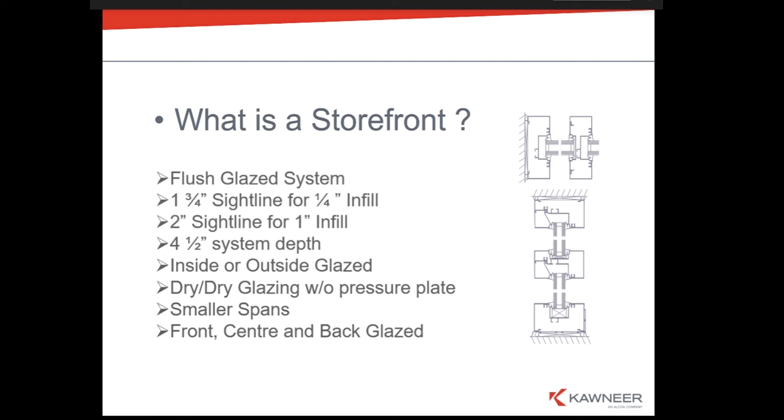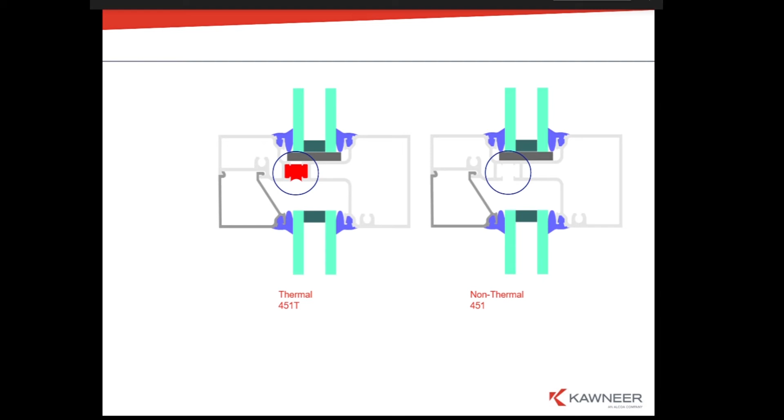In case of a storefront, you're basically taking an extrusion like you see on the right-hand side here and filling that pocket with a resin component, and then cutting away this leg after that pocket is filled, creating a thermal break between the two pieces of aluminum, which at the time of extrusion and finishing were one. So that's how a storefront system is given its thermal break or thermal properties within that aluminum extrusion.

As I alluded to in that first slide, one of the differences between storefront and curtain wall is the span. So if you're looking at an opening within any of your building projects that is 10 feet plus or minus a little bit high, you can look at a storefront product. Once you start moving into rough openings and elevations that are exceeding that 10.5, 11 foot mark, then you're automatically going to be considering a curtain wall product. One of the quick ways to determine what you want to start looking at as far as product application on your build.

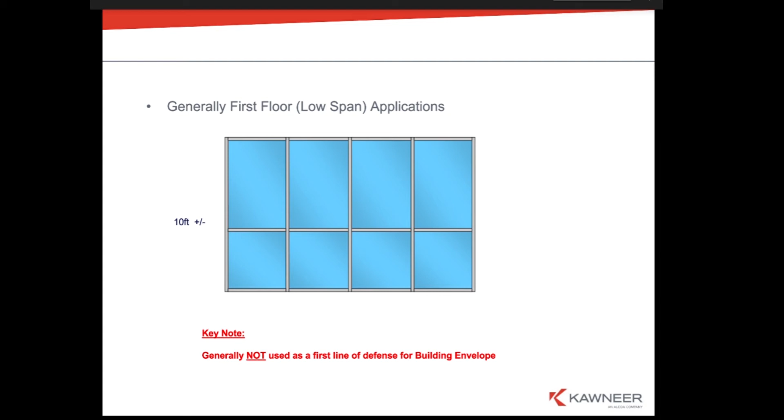Any rain and water that's driven at this elevation and enters the system, basically the horizontals will guide it to the vertical, and all the water that may be collected by these horizontals within the glazing cavities are all diverted to the sill and out of the building.

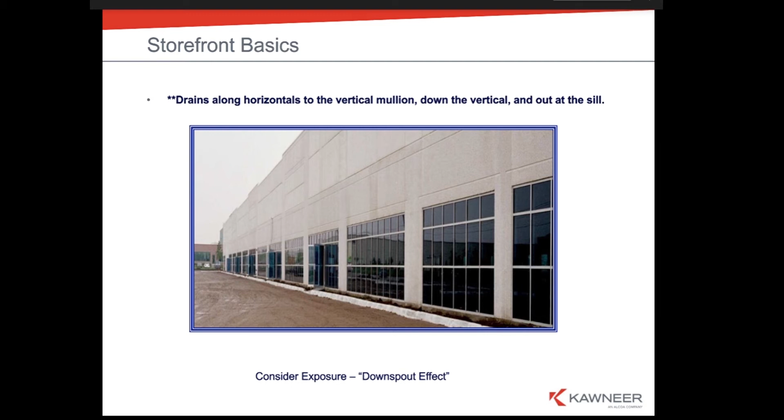The difference between that and a curtain wall is a curtain wall handles water on its own at every one of these daylight openings. So every daylight opening in a curtain wall is drained on the horizontal below the piece of glass, and it just becomes a tighter air seal and a tighter wall, air and water-wise, for sure.

So again, this is just showing the drainage path of the storefront. As I alluded, the water collects any water or condensation that you may get sitting in this cavity under the glass, diverts to the vertical and all the way down the system and out of the framing system.

So if you had a north-facing or northwest-facing elevation, and say it was 10 feet high, and wanted 3 or 4 horizontal members in that opening, you're creating a lot of area for water to collect. And on a heavy rain day, which we can see in southern Alberta, a system like this would probably have more water running in it and trying to get out the sill than it could handle, and therefore would probably end up inside the building.

There are ways to combat that with different sill flashings and whatnot, but it is one of the things that with a storefront system, we should always be considering: what elevation is it facing, how susceptible to driving rain is it, and how many horizontals am I putting in that system, adding a water collection point with each horizontal that's added. Just one of the things to keep in mind.

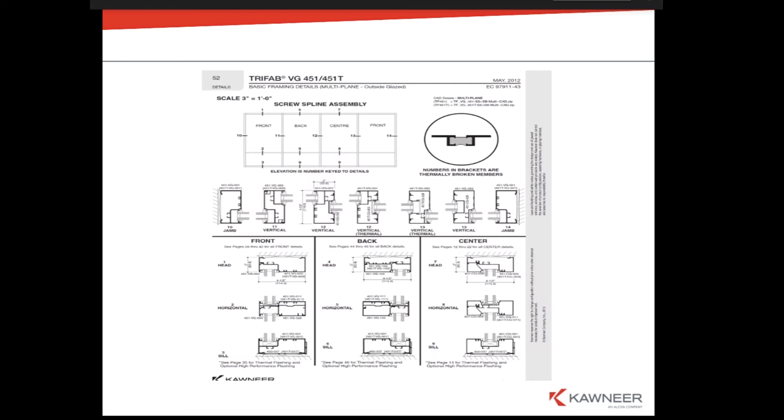Just a little section, cut through section, plan section of storefront, and it's called Trifab in our glossary, for the reasons that it can be glazed in the front plane of the frame, the back plane of the frame, or the center plane of the frame. Depending on the aesthetic look we're looking for, and where in the wall cavity we're placing it, to line up our thermal breaks with the building construction around us, this option can move the glass plane to the front, back, or keep it in the center. The center in a storefront is probably used 99% of the time.

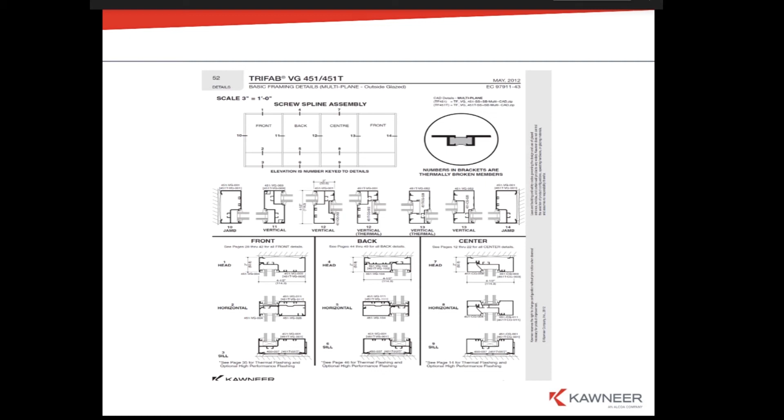So, curtain wall. Again, you're looking at—if you walked up to a building and saw an elevation that's 10 feet high with 13 modules at 1,200 widths running down it, at first glance it's kind of tough to understand: is that a curtain wall or is it a storefront?

The curtain wall, to start with, in its made-for application, is a non-load bearing exterior wall—realistically a complete envelope designed to go around the building on all elevations. It's only designed to carry the load of the metal and the glass itself, and any add-ons you'd see in our catalog, for example sun shading products and whatnot.

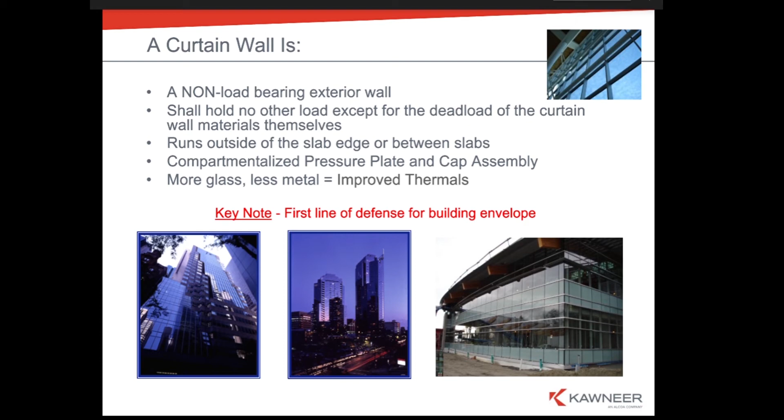Again, compartmentalized DLOs using pressure plate and cap assembly. And just a note—in all applications, and we'll get into this when we talk about thermals—the more glass you have on an elevation, the better the thermal performance is overall.

Curtain wall, as we discussed, is used for larger spans. Primarily, if you were looking through my product information on a curtain wall product, you'd see in the back pages some span graphs, helping you understand how high this vertical member can span based on how deep it is without failing.

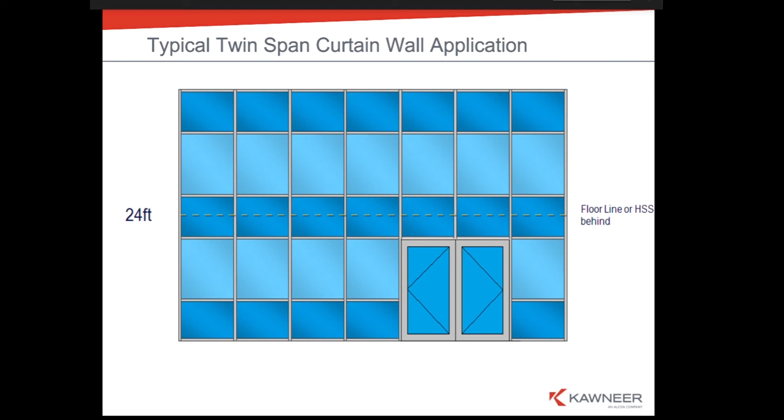You'll see areas that talk about twin span and single span. Twin span, anytime you hear that in the glazing industry, at the very least is something where I'm sitting at the sill and spanning the floor slab into a second floor application, with my anchoring points at the sill. I'd have another anchor at my second floor, or my line of HSS steel, and then another anchor at the head. The anchors at the sills are referred to as dead load anchors, while the anchors at the midpoint and the head are considered wind load anchors—they're not carrying the load of the system, but they're stopping the wall from deflecting laterally under wind load pressures.

So, if I was looking at a system with a 10-foot span, just as an example, and I'm only anchoring at the sill and the head of a vertical mullion—this is an intermediate condition, not so much a jamb condition—at a certain wind load, 30 PSF in this case, the middle of that mullion has the opportunity, depending on its size, span, and load, to over-deflect. If a vertical mullion over-deflects to that degree, you'd have glass falling out, breakage, and catastrophic failure. But the max that system, in this case an overall 6-inch system with a 3 3/4 inch back section, will allow is basically a 10-foot span anchored at head and sill at 30 pounds lateral wind load.

If I introduced a midpoint anchor in any application where we're close to a mullion's capabilities, that same back section of 3 3/4 inch deep is now capable of spanning 25 feet versus 10 feet, just because we put that HSS steel in there. It stops the midpoint from over-deflecting, and you can create larger spans by giving tiebacks in the structure for your curtain walls.

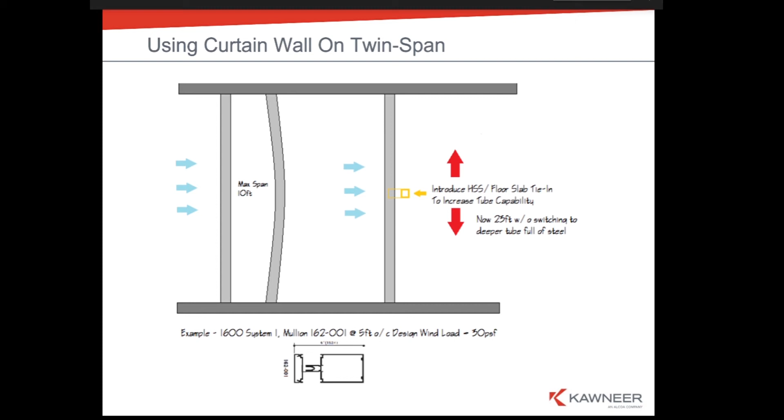Again, why use curtain wall? As far as modulus of elasticity in comparison with steel, which is obviously very high, but it has no thermal properties and it's tough to deal with from that standpoint. Aluminum is the next best thing in comparison to where your fiberglass or PVCs and vinyls may sit, and that's why aluminum is one of the most commonly used items in commercial building products. Certainly you cannot beat fiberglass and PVC in respect to thermal properties, but from a structural capability and span, deflection properties, etc., that's where you start running into problems with those items.

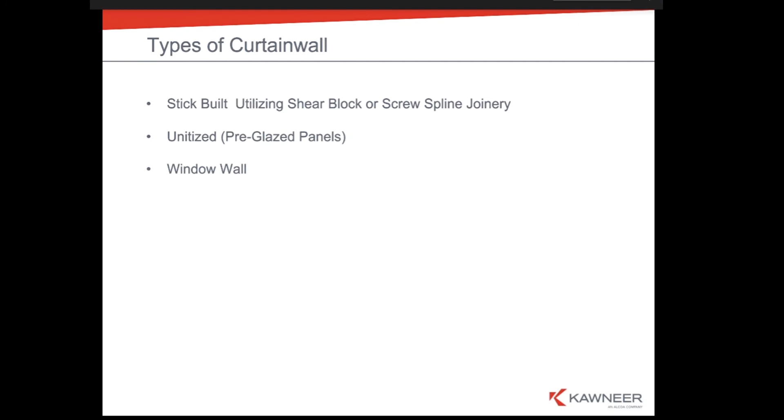Therefore, it's not going to tear away, break down, and you never have to be concerned about this silicone joint breaking down 20 years from now. You do not have to worry about air and water coming through that area because of that tie-in. That is probably one of the biggest things to remember between curtain wall and storefront, that ability and the benefit to it. And if you see specifications out in the industry for tender where storefront is specified, a lot of the glazing shops and subcontractors are going to be sending in RFIs to add, or requests to change to a curtain wall product for this reason specifically.

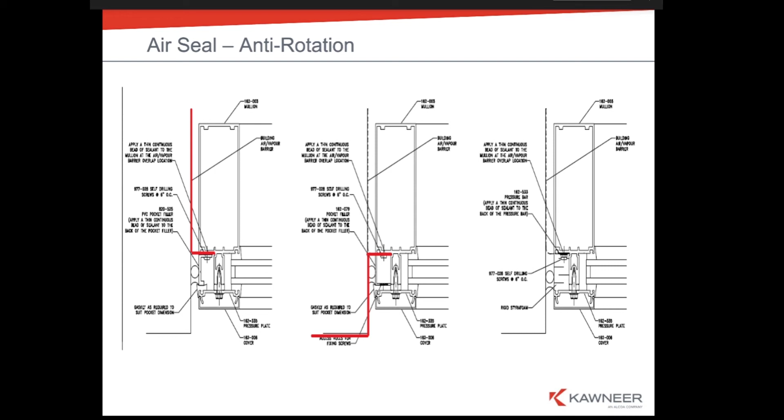So some different curtain wall framing options, because there are some. We basically talk about stick-built curtain walls, where guys are coming on site and putting the frames in, glazing them after, versus unitized systems where the curtain wall is showing up already glazed in frames and being hoisted up the building and installed.

A stick-built system, like the 1600 UT you're starting to get familiar with, uses shear block applied joinery. The shear block is a little piece of aluminum fastened to the vertical mullion, and the horizontal slides over top of that and gets screwed to it. So tubular mullions, shear blocks, and horizontals sliding on. They build these depending on elevation, sometimes in their shop, but if it's large it's done on site, alternating vertical mullion, horizontal, vertical mullion, horizontal, and so on.

The other type of stick-built curtain wall system you can encounter is a screw spline. Rather than tubular vertical mullions, you've got an open vertical mullion with a female and male half. You run screws through clearance holes in the vertical into screw splines into the horizontal members, and that's how the joinery is done. These types of systems can be pre-glazed, and there are certain applications where they're used.

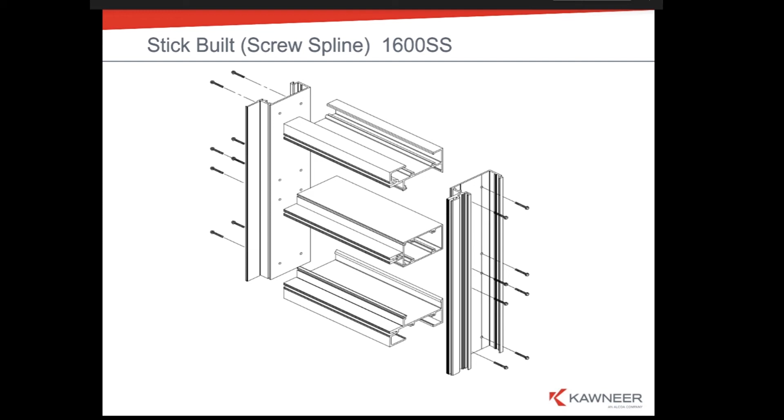Another curtain wall system you'll see on large projects is where you've got consistent panels. Consistent panels is the key when looking at any unitized system. If you have different openings with different module widths and heights, stick-built is the way to go. These are very cost effective when you've got consistency on all four sides of the building up the floors, and not so much when it's inconsistent.

These projects are fabricated and machined in the shop, pre-glazed, and come to site. You basically start at the bottom, working left to right, and stack them on top of each other all the way up the building. I'll give a couple examples of these jobs in Calgary if people are interested in seeing them firsthand.

Another product that falls under curtain wall on the website, but acts more like a storefront, if that doesn't confuse you, is used primarily in residential condominium towers. Other products and manufacturers playing this market would be Toro windows and Starline windows, which do quite a bit of work in the East Village area of Calgary for sure.

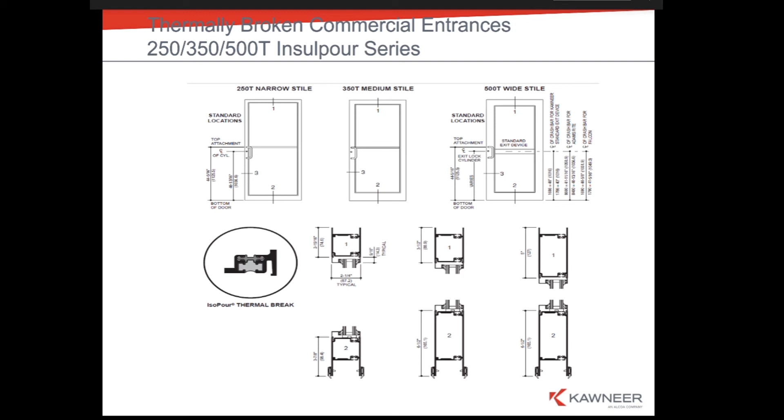Operable windows — again, the website will give you quite a variety. I always promote and try to get specified the items I'm building in Lethbridge for a variety of reasons, versus say in Pennsylvania. This window here, the AA6400 series, you'll see on our website. It has fixed framing and an operable window package where it's top hung project out, side hung project out, bottom hung project in — typical configurations you'd see in your home, very reminiscent of the vinyl window profile in your home, though obviously it can be made larger because it's aluminum.

These windows can be installed into a window frame, a storefront frame, or a curtain wall frame. So anytime you're looking at operable windows within your building, this is one you should consider for sure. It can be double or triple glazed just by changing the interior glass stop.

This is the next window that is getting a lot of traction, again code driven, mainly because its thermal properties are better than the AA6400. That's mainly because this window has no real exterior aluminum frame to it. The glass is either structural silicone or 3M taped to the back section, so the only exposure to the cold is really the face of the glass. The part at the head and sill is a non-thermal polyamide type product.

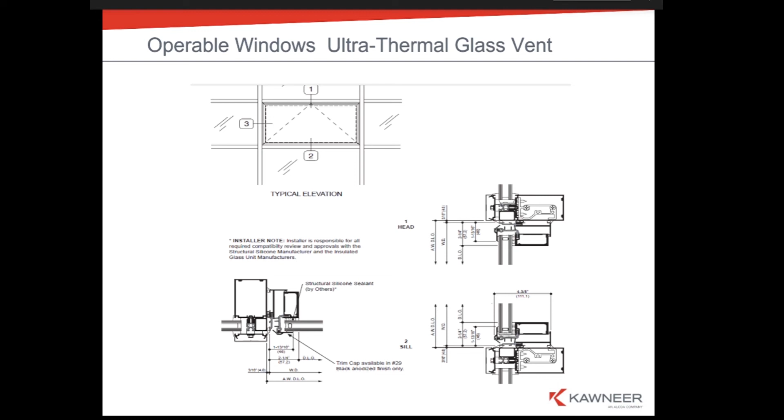After all that's said and done, and we've gone through the differences of curtain wall, storefront, some windows and doors, it's like, okay, that's good information. But if I'm looking at a project, where do I start? How do I know what to choose? Where do I start?

So I thought I would throw together a quick spreadsheet, hopefully identifying some of the key determining products that, when I'm reviewing a project, are the first things I look at to fine-tune that assessment, if you will.

So right off the bat, when I'm looking at any elevation, the first thing I'm doing is looking at frame height. As we've talked about for storefront, if I'm under 10 feet, that could be a consideration. If I'm over 10 feet, it's curtain wall. So it's curtain wall or storefront, just from that standpoint.

We talked about curtain wall being installed in different manners, primarily designed to be proud of the slab and creating a full envelope. So if that was your design intent, you only have one choice: curtain wall. Nothing else is on the table from that standpoint.

If you're dealing with punched openings within your building, or any conditions where you've got a jamb and head and you're not really creating the exterior envelope with the curtain wall, but rather filling an opening, then you can go curtain wall, storefront, or a window product. But again, what's your height? If it's under 10 feet, you can look at storefront and window products. But if it's over 10 feet, you're still destined to be using curtain wall.

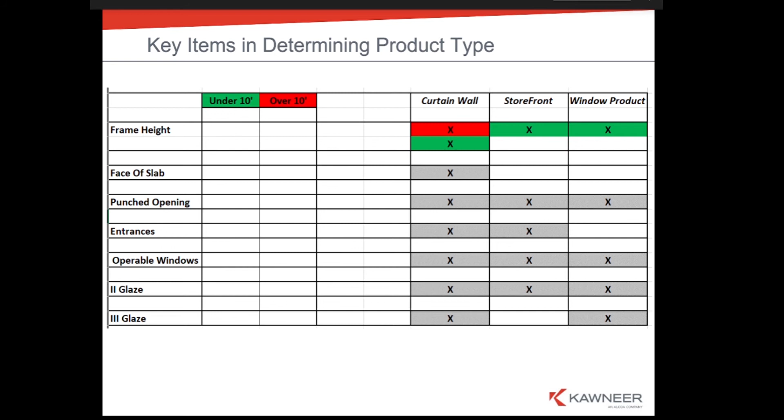Talking about thermal requirements and performance requirements on your fenestration can be a very in-depth conversation. We know right now within Alberta that the code specifies that all your fenestration will be no greater than 1.9 watts per meter squared, or 0.32 to 0.33 BTUs, I guess that's what it is.

Every architectural detail manual you will find for every product in my portfolio has, towards the back of the book after the details, the thermal information. Every one of them will have this thermal matrix, which allows you to briefly look at, okay, if I need to be at that 0.33, 0.32 number, what do I need for glass? Oh, I need glass that performs to a winter nighttime U-value, or center of glass performance number, of 0.24. I apologize these are all in imperial, as I'm an American company. But in any case, these charts tell you right off the bat what system you need to hit a performance target.

If you're doing a new build, 1.9 is automatic. It could be more aggressive than that, depending on how your modeling is coming along, right?

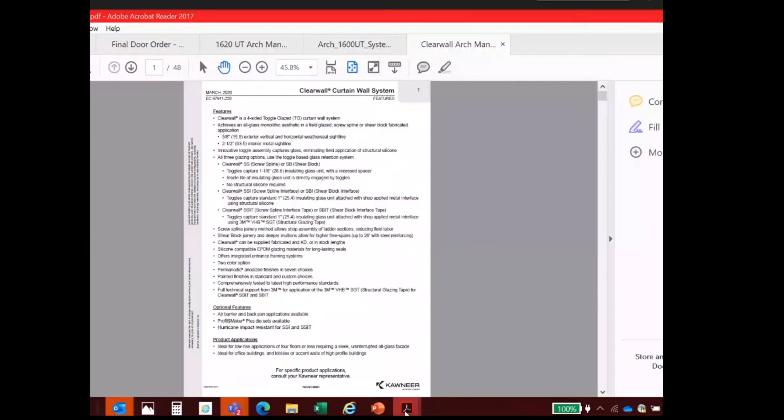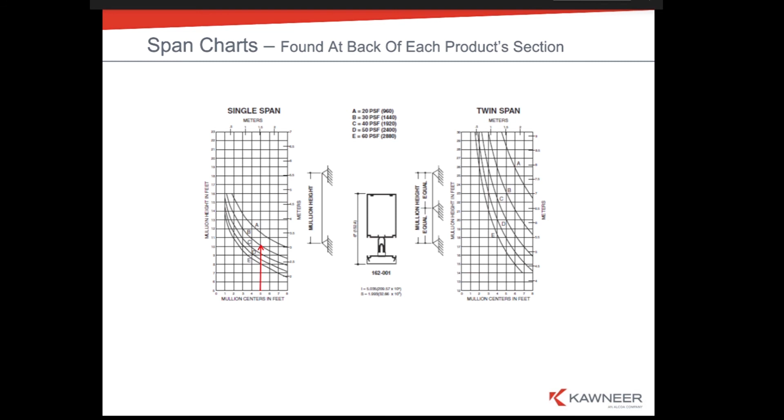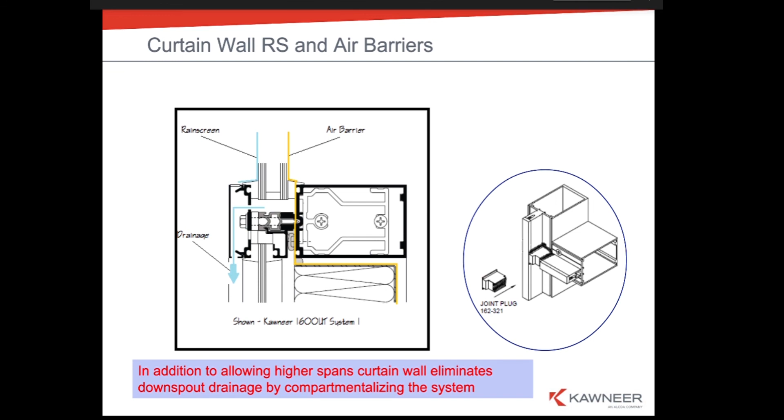Let me try and explain just a little bit through this page here the difference between an SSG system and a captured system. Essentially, if we look at this stick-built curtain wall system, you've got your vertical member having the pressure plate and cap, and the horizontal shows the assembly of the back section, the pressure plate, and the beauty cap that covers the pressure plate. We understand that pressure plate is designed to capture the glass into the glazing pocket and hold it there.

So in a two-sided captured system, our 1600 system 2, the horizontal would still have the cap and pressure plate to hold the glass, but this vertical member would not have the cap and pressure plate, nor would it have the nose or that assembly. The whole front face will be flat, where the glass basically sits in the same plane. The glass bite, meaning the dimension the glass travels into the frame, is the same at a half inch per side, but there's just no nose there.

So when the glass is put into place and the pressure plate is applied at head and sill, same as on a 4-sided system, they go to the inside of the building and caulk the gap in this area with structural silicone, which cures to adhere the glass to the vertical member. On the outside, where the two exterior pieces of glass come together with a joint of maybe 3/8 of an inch, that joint is pumped full of structural silicone all the way back to the inside of the sealed unit to give you that exterior rain seal.

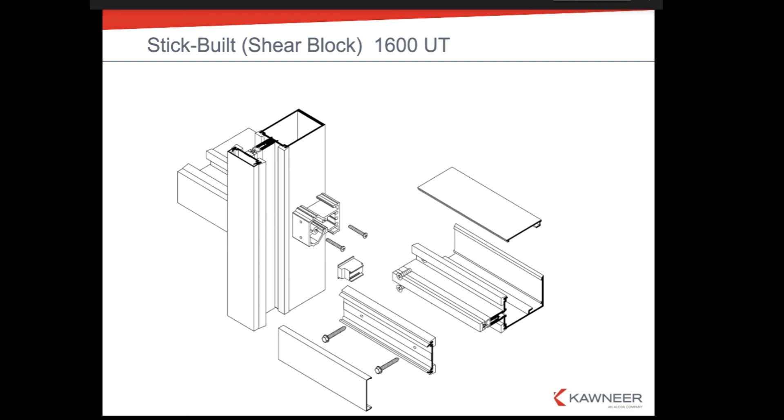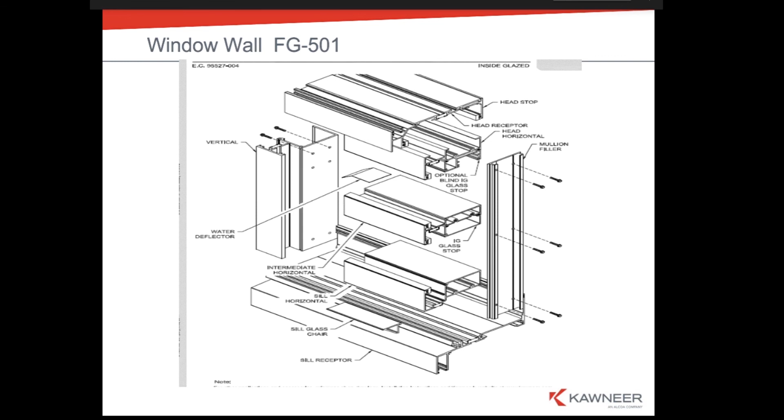Have I confused everybody completely with that explanation? Don't worry, it's all Darren's fault, he asked the question like 20 minutes ago. No, I only asked if it was actually just glued. I know, I'm sorry, he just blew it out of the water there, saying 'show us this stuff.'

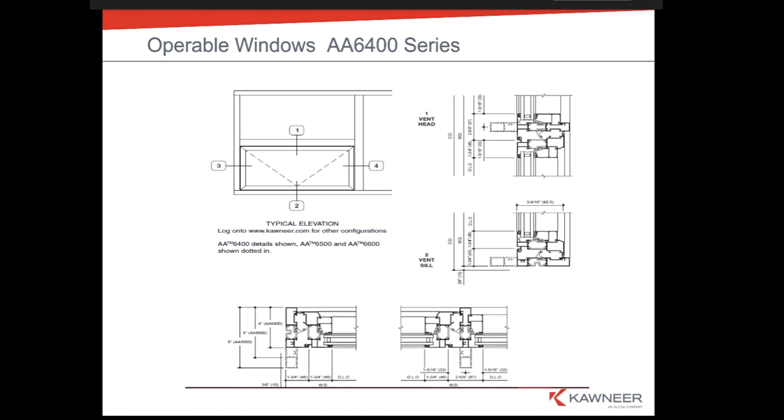When people start talking about structural silicone glaze systems and 3M tape, it's hard to believe that you could be looking at a project that's 40 stories tall and realize that's all glued in.

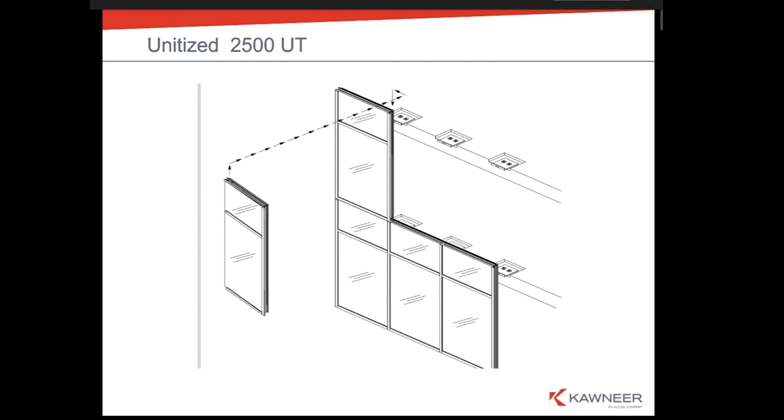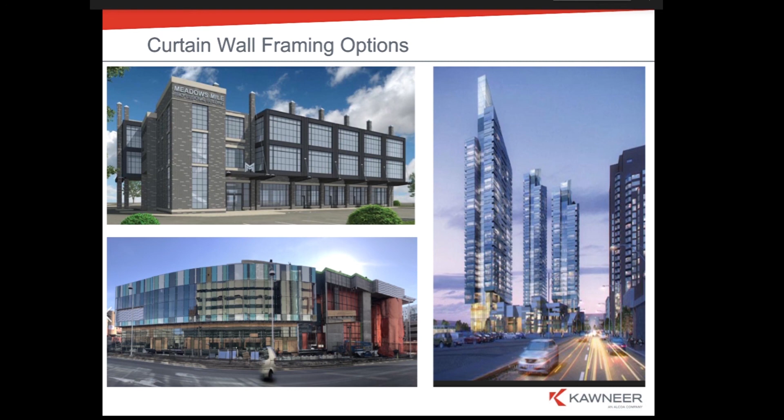Again, I do want to mention, I think you guys are in the process of working on some projects. If you have a question, if something's come up that's related to your project and you weren't fully clear on what I was trying to relay - because as I said, I can go on - please don't hesitate to shoot me an email. I'd be more than happy to respond.

So if anybody has any more questions, feel free to ask. Otherwise, I appreciate the time today. It's always a pleasure talking about these systems and how they're applied. And again, if anybody has any further questions later than this, feel free to ask.